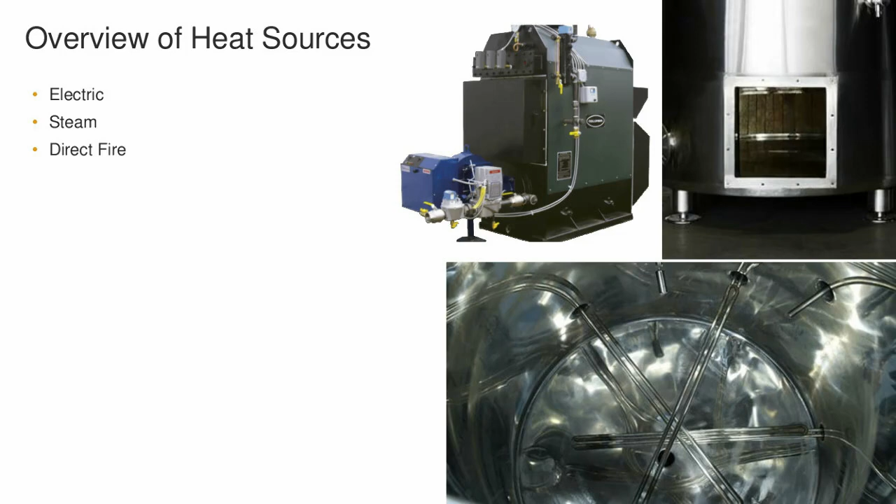So I'll get right to it. It's obviously a pretty big decision when you're looking to put in a brewery. You're going to take a look at what you're doing, and then you really have to make a choice of which heating means you're going to do, and in some cases a combination of heating means. It doesn't necessarily mean you're going to do all one, although most folks do it that way, but we've done plenty of hybrid systems. So a lot of things to consider when making that decision.

The size of the brewery is probably the biggest one. If you're doing smaller breweries, you have more of a range. But once you start getting into quite large breweries, 20, 30 barrel plus, your options start to become limited — primarily steam at that point.

Space requirements is a very big consideration when looking at which of the heating systems to put in. We'll talk about which ones take up less room, and a little about the infrastructure you'll need for any of the three heating methods.

Equipment cost is certainly a big consideration — how much putting in these systems is going to cost relative to your business plan. And installation cost becomes a very big consideration too, where your capital outlay for the equipment may be low, but installation on vent fans and things can start adding up.

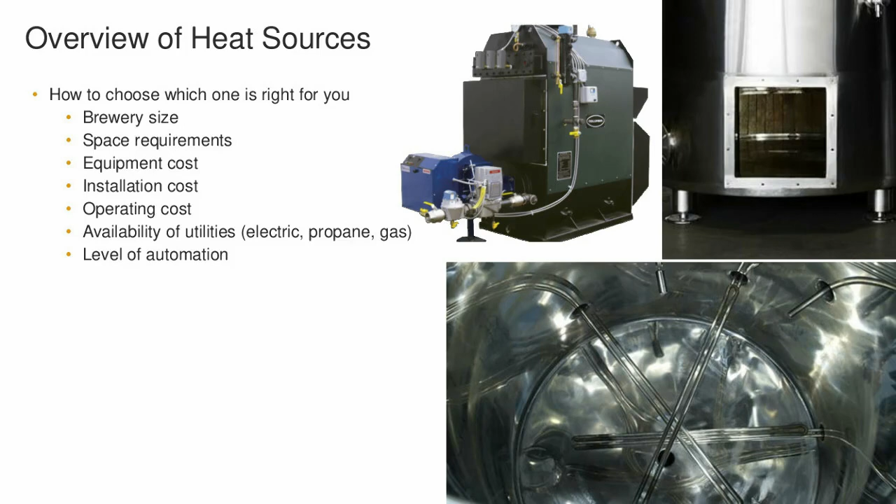All right, so I'm going to jump right in. I'm going to be doing the electric portion of things, so let's get started on that.

So, electric heat. I've been working with electric systems myself since probably the year 2000. Started our business here in 2003 with all-electric breweries. So I've been through a lot of the trials and tribulations of electric brew houses and how to make them into the mainstream. As I think a lot of you know, there are quite a few electric breweries out there at this point in time.

It's become a very affordable, easy, controllable way, especially on the nano breweries, and definitely on microbreweries, and even breweries up to 15 barrel so far we've done. I'm sure there are larger ones out there — I know we've designed 20 barrel electric systems, but it's just a matter of utilities that have to be considered at that point where it's feasible.

So system size could be any size, like I said, up to 15, 20, perhaps beyond. Talking about my experience, 15 has been the largest ones that we've done, and we've done several of those. They worked out very well. A lot of people don't really think about electric for the larger breweries, but they could be very efficient. They can work very, very well, especially if you have very decent electrical costs, and so on.

Another nice thing about electric heat is it is the smallest footprint in all of the brewing systems. Where you're running electricity, your elements are inside the vessels. And as far as external devices, there really are not any. You don't have a boiler room taking up space. For direct fire, you have your gas burners that are going to require certain air requirements and airflow, so it becomes more of a space constraint that way.

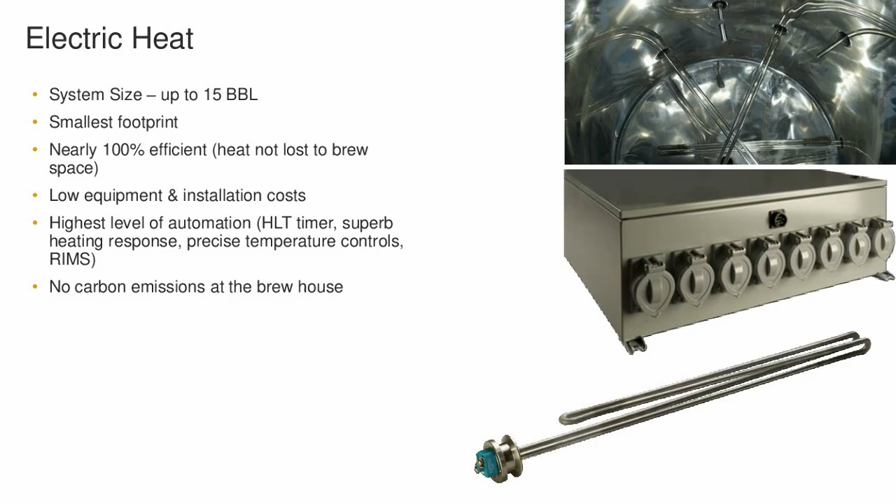So some considerations when putting in electric and evaluating an electric system to make sure that it is right for you. We are dealing with electricity, and I've been around electricity pretty much all my life. Even when I was young, sticking a fork in an outlet, it's not fun, so you have to be protected. So with electricity, there are things that we feel are a must in a brew house. You're dealing with liquids, you're dealing with electricity.

So the first very clear item is to have GFCI protection on your systems. And that can come in different forms. GFI protection can be part of your breaker panel feeding your brewery. However, that is usually only going to work out maybe up to a 1-barrel system, because the GFCI breaker sizes available usually are not very high. So if you're looking at a 150 amp 3-phase system, you're not going to be powering a 150 amp 3-phase GFI to the brew house from your distribution panel.

So a nice design there is to put GFCIs inside the control panel as part of the design. That's what we employ in there. There's different ways to do that. I know some manufacturers handle it as a whole, so there's GFCI protection that will shut the entire panel down if there's an issue. What we employ is individual GFCI protection. So if there is an issue with one element, just that one element will turn off and doesn't disrupt the entire brew session. So either way, there's different ways to look at it.

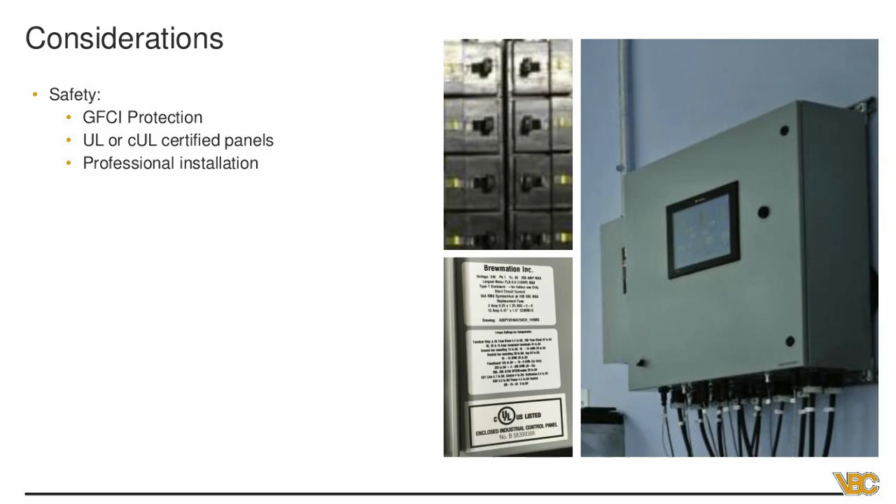And if you actually have 3-phase, in most cases, you're a lot better off utilizing the 3-phase as opposed to just taking the single phase from the 3-phase, because you want to balance that load on your entire system. So if you have 3-phase, certainly plan to utilize that as opposed to pulling off the single phase. And you'll also get better rates when you're working on 3-phase. The electric company loves balanced load, so you have some better rates there.

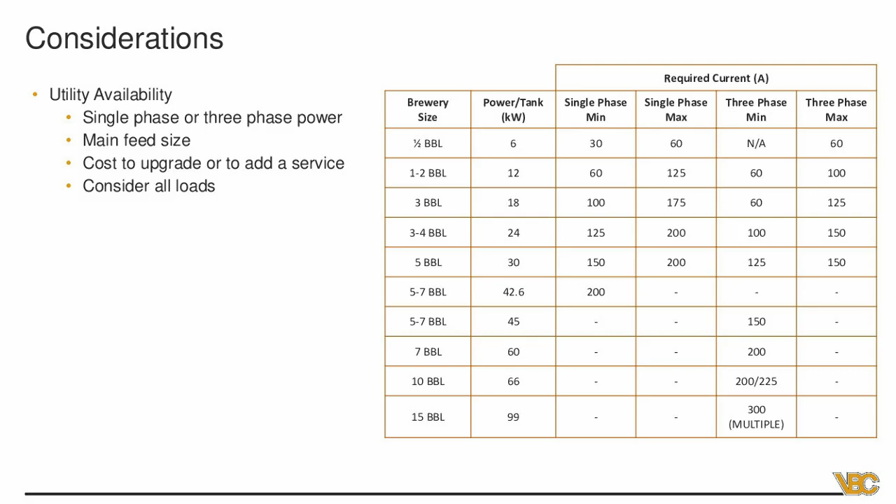A couple other considerations: watt density. A lot of folks think about electric and worry about scorching wort, but when a system's done properly, the watt density is low enough. You kind of think of watt density as the surface area that is touching the wort. So in properly designed systems, we have a proper number of elements, so your watt density is acceptable and you will not get the scorching. So that's definitely something to look at, what that value is, to make sure it is proper.

Also, the ability to adjust from 0 to 100%. I've seen some panels out there where you just knock one of the elements off, but then you have the other elements running at 100%. And that doesn't help you when you have a high gravity beer and you're only a quarter way full. You want to be able to run your elements at a very low percentage. So you want that 0 to 100%. I feel it's very important, and that will eliminate any scorching.

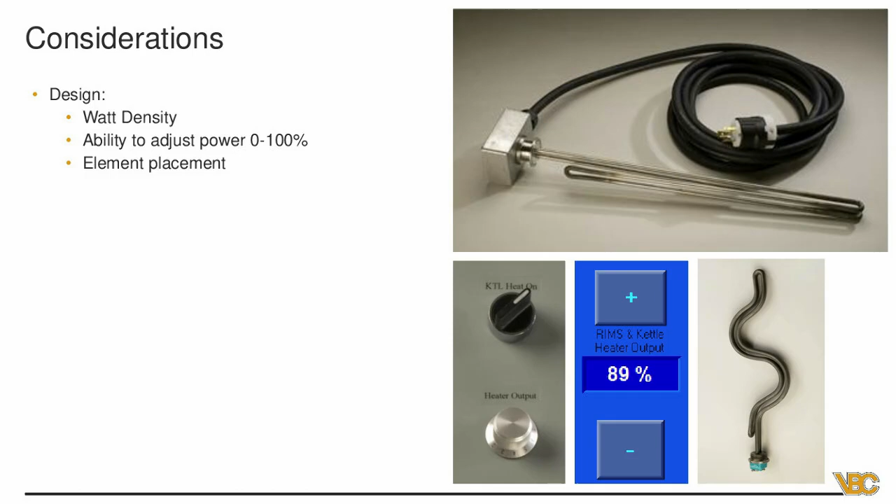Element placement as well is something to consider, where they're positioned to get your rolling boil. Other considerations here, some level sensing. You don't want to run the elements dry, so we would typically put in level sensors to make sure that doesn't happen. The bottom one is a tank level sensor.

The one above it is a RIMS sensor. Boil over control is fantastic with electric heat. You're able to really get a very good reaction and response time with electric. Heat ramping is very quick if it's sized properly. The timer start we talked about a little bit, and also remote operation.

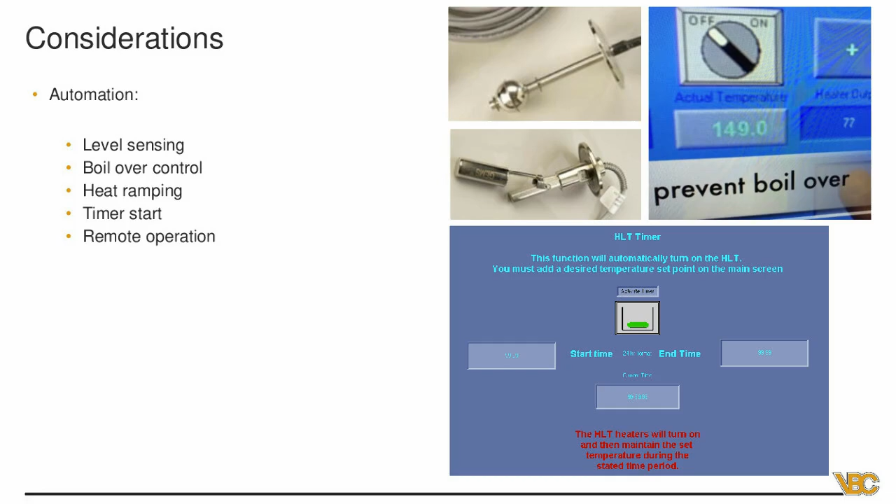You could tap into your system with your network, and you could turn on the hot liquor tank before you come in if you don't have the timer set up. So I'm going to go ahead and pass this along for steam, if you want to pop back up.

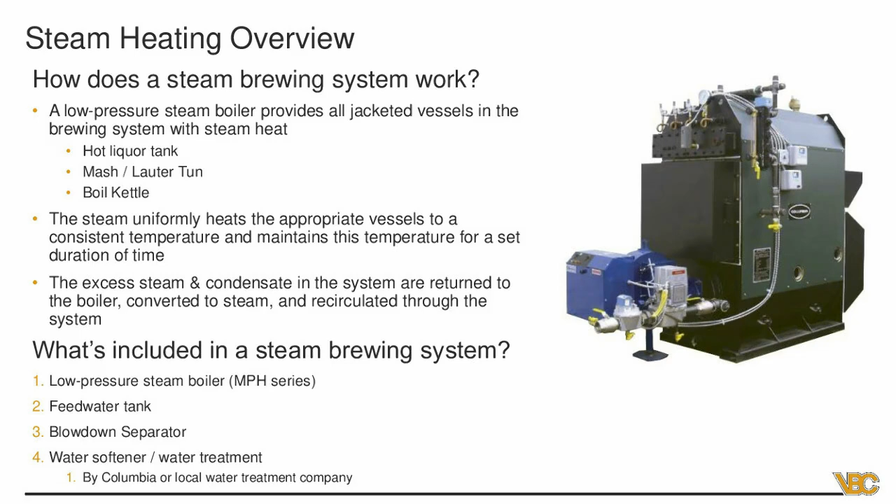So that sounds a little bit technical, but if we go back here and we look at the MPH here, you can see a burner, that blue burn on the bottom left, shoots a flame across the bottom of the boiler. And then on the right side, you can see that black turnaround. The flame turns around once more and then turns around again. And those 3 passes, there are tubes inside of that boiler. It heats up those tubes, which in turn causes steam to be produced at the top of the boiler. Those 3 passes are in a large part responsible for why you're getting a good efficiency here.

Your fuels can vary because not everybody has natural gas. That's typically going to be the cheapest, but there's also propane, fuel oil, and you can run on dual fuel if you even need to. Your operational costs: gas is more cost effective than electricity in most locations. Sorry, there was a typo there. And you can only brew with electricity up to a certain size typically. After that, the amount of amperage needed becomes too great to justify the price, or you might not even be able to find the service, where most places you're going to find fuel oil, you're going to find natural gas.

There's versatility involved with a steam boiler here. A boiler does not require regular maintenance during the brewing, so you can kind of just leave it on its own to do its thing, assuming everything is set up properly. Most of our boilers use 115-volt single-phase power and require less than 10 amps at full load, so you're not really going to have to make power modifications to your brewery, which could be convenient. Relative to the steam they're producing and the systems they are going to be used with, they can fit a small footprint. They're, of course, reliable, assuming you're treating them right and you're treating your water.

And they can range up to 250 horsepower, which supplies 8,000 pounds of steam per hour, and that's enough to power a 125-barrel brew house. I'm assuming most of you guys are going to be a little bit smaller than that, but hell, with the way craft brewing is going, hopefully we're all going to be expanding and we're going to be having brew houses like that.

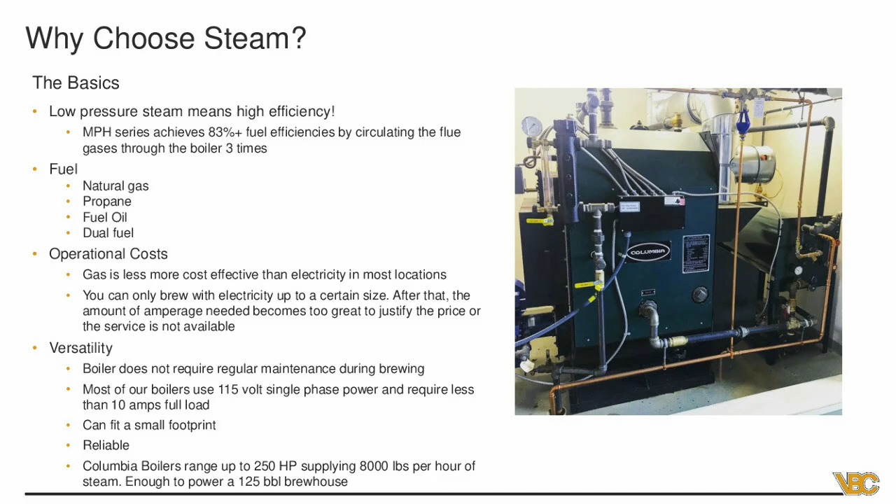So why would a brewer choose steam versus anyone else? So out of sight, out of mind, and this is something I see as an advantage when you get into these bigger breweries, is a boiler is typically placed in a separate room. It's not mandatory, but typically it's away from everything, which could leave you more room to leave out your appealing stainless steel brew vessels. Not that there's anything not attractive about a Columbia boiler here, but everyone does like to see the stainless steel and the copper vessels. And the compartmentalization of this equipment kind of allows it to stay safe. So you're not knocking into it, hitting it with kegs, or sweeping dust onto it. It just kind of stays isolated on its own.

Brewing with steam is better for your beer. So, of course, with the steam being controlled, the temperature, there's very little chance of caramelization of sugars with steam, and it's transferred through a larger surface area, which is much more controlled over the temperature. I'll skip here the DMS and go down to the heating speed. Because of the surface area that it's exposed to, steam provides the fastest kettle temperature ramp-up rates. So you have the sidewalls and the bottom because these vessels are jacketed and the steam is completely encompassing all of that surface area. Additionally, steam has the power to produce a vigorous boil consistently, and a vigorous boil promotes better utilization of hops and boils off DMS, which will result in an off flavor in your beer.

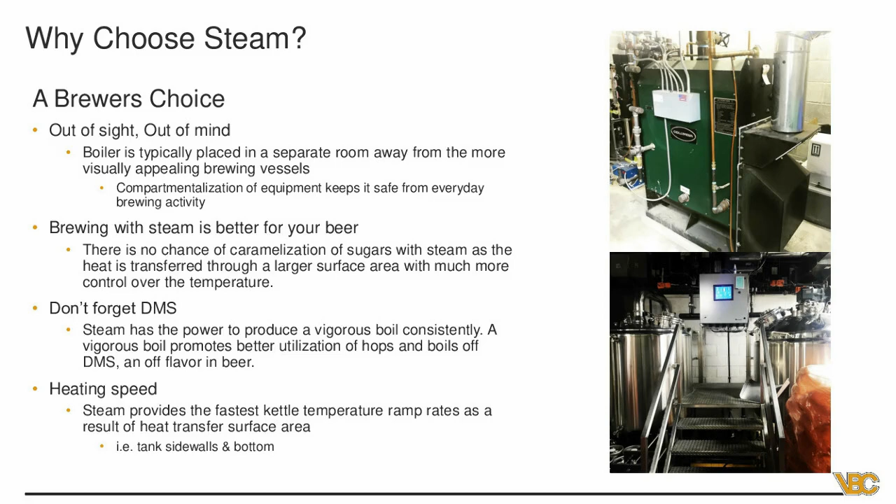So here are a couple other considerations, couple snags here that might say, hey, is steam right for me? So you're going to have startup costs. I think that's pretty much assumed based off of understanding you need a steam system. So although running a steam boiler may be the most cost-effective and efficient method for brewing, you're going to have these costs below. You're going to have to buy the boiler. You're going to have to get it installed. It comes with auxiliary equipment, and unfortunately, most times you're going to need building modifications. The system is more than just a boiler, as I stated before. So you're going to need to have custom insulated piping, which could be a pain in the butt, but obviously worth it to maintain your efficiencies.

You're going to need ductwork installed for the flue gases to go up, and you're going to need a blowdown separator and a feed water system.

Just to breeze over what a blowdown separator is: minerals sit at the bottom of the boiler. Minerals that are in the water as it heats up will fall down to the bottom of the boiler, and if they remain in there, they'll start to corrode the inside of the boiler, which you don't want for your metal. So what you have to do is blow down those minerals out of the boiler, and then obviously refill the boiler with a little bit of water.

A blowdown separator takes that extremely hot steam, condensate, and water blowdown, and mixes it with cooler water so that you're not shooting it right down into, say, a PVC pipe system and melting the PVC. That's not required by law in all states. I know in Pennsylvania for a low pressure boiler it is not, but it's highly recommended for the whole system.

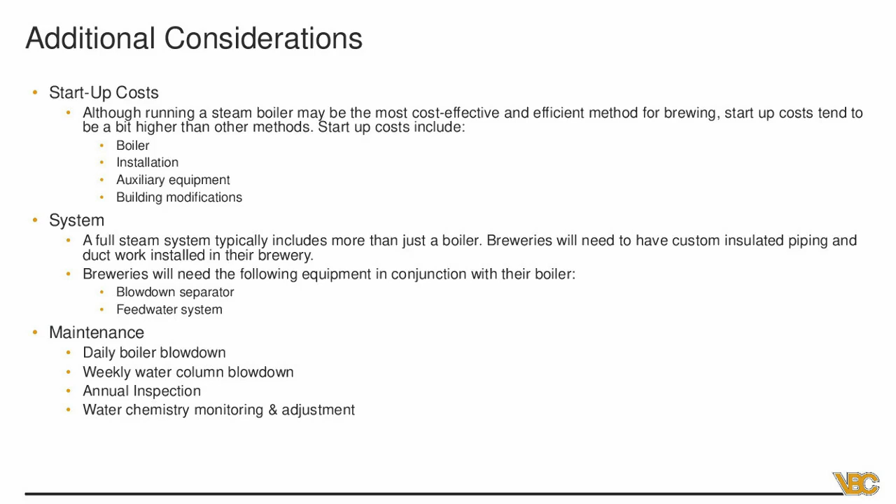So here's just some pictures of the boilers we provide. Obviously there are other companies, but I am a Columbia rep here. This is our MPH series low pressure steam boiler.

There's a blowdown and a feed water system over here. Here are some basic controls that protect your boiler: high water and low water cutoff controls, a pressure gauge so you know what you're coming out at, and your burner.

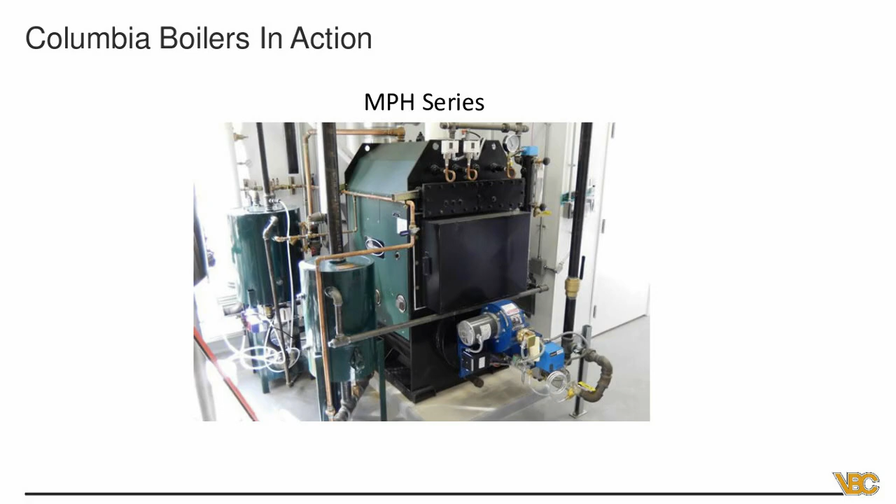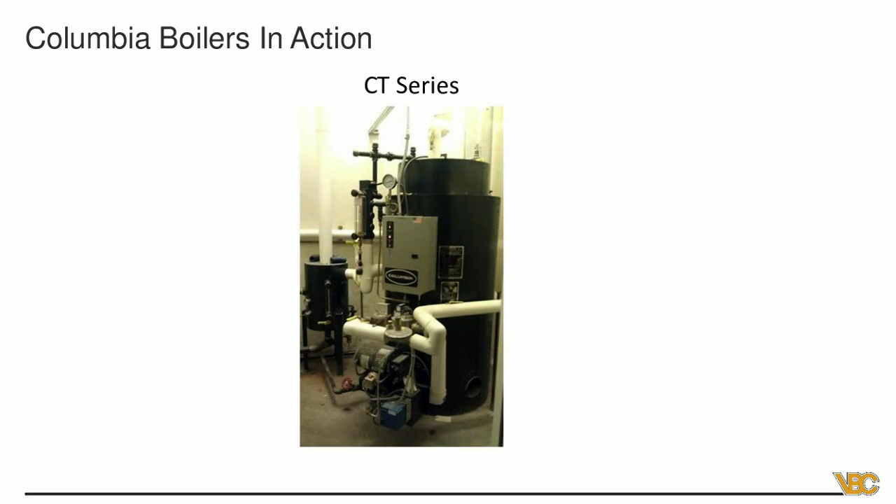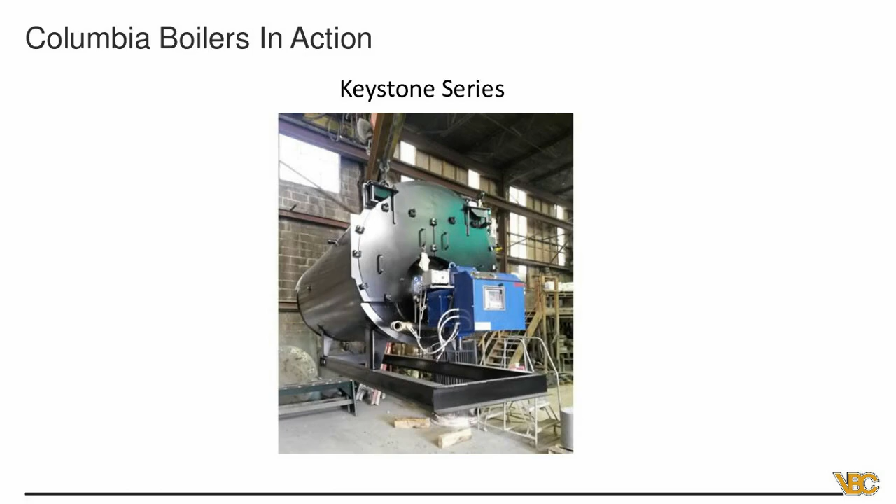Okay, now we're going to hand it off to direct and indirect fire here.

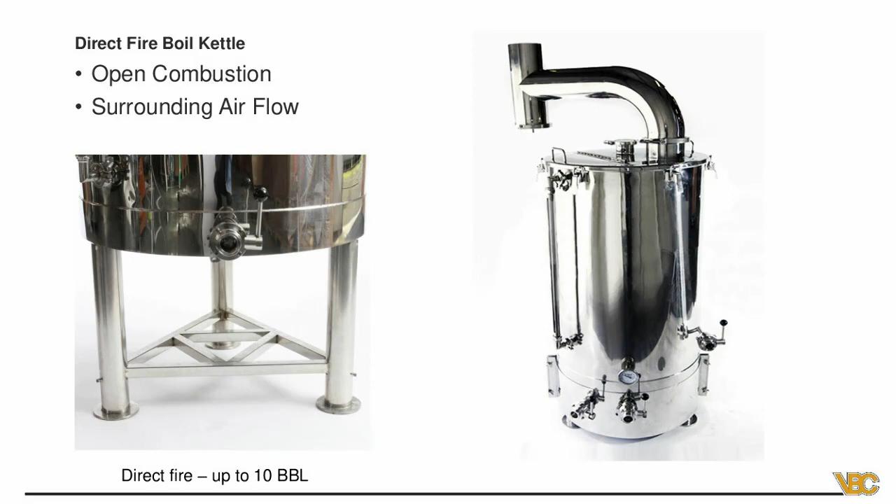The next slide we'll hit here, and we typically go up to 10 barrels on these things safely. My preferred choice, if you are going with fire, natural gas, or propane, are the two common options, it just depends on where you're at, is indirect fire.

So at this point, it's a lot safer for your brewery, your brewers, the area around there. There's no combustion gases being exposed to the brewery or the brewers. There's less heat going into the actual brewery. The flame is really underneath. It's not a true indirect system like a heat exchanger in another room, but it really controls your airflow when you say indirect fire. The refractory brick is great because there's much more insulation. These kettles are a little more expensive for sure, and heavier.

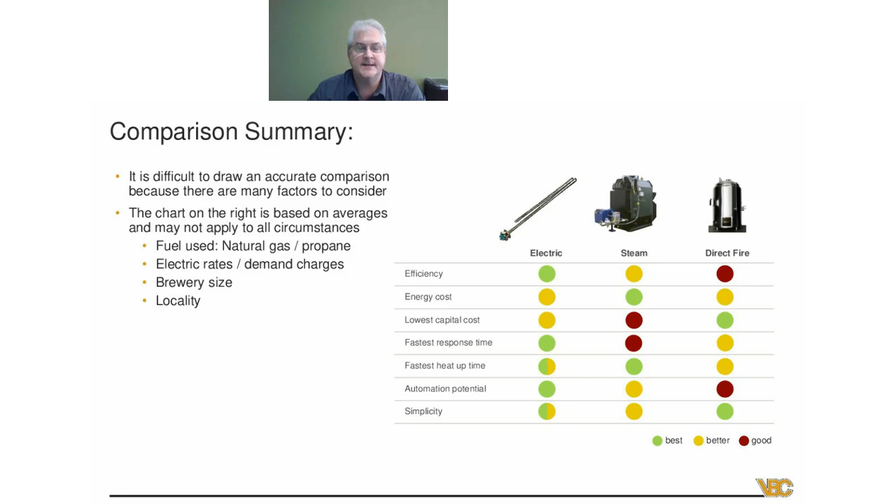All right, so I'm going to take - so you guys can see this a little bit better. This is interesting, we get the question quite a bit, and this may spur a lot of questions and maybe even spur some controversy. I don't know, but that's not the purpose here.

The first thing I'm saying when we start comparing all three of the different methods is that it is difficult to draw an accurate comparison because there's so many factors to consider. But since we get a lot of questions, we wanted to put a table together that gives a general overview on average. But the fine print here is that a lot of these can be switched around based on individual circumstances. So basically, the chart on the right is using averages, and we're looking at fuel used, which can definitely vary these results.

Natural gas versus propane, electric rate, demand charges, if you have them, can also change things around quite a bit. Talk about that in a sec. Obviously, brewery size and even locality. I believe at least two states, Texas and California, will require the steam boilers to be low NOx boilers, and that's obviously a consideration that can sway one way or the other.

But when we look at efficiency, just pure efficiency of BTUs being transferred, as we discussed, electric, when you do have immersion heaters, you're very close to 100%. Someone asked in the questions what the possibilities are for an electric steam boiler, and absolutely, that is definitely a technology. We offer that as well. So electric boilers are definitely a nice choice if you did want to use electric and you just really wanted to have that steam for your brew kettle.

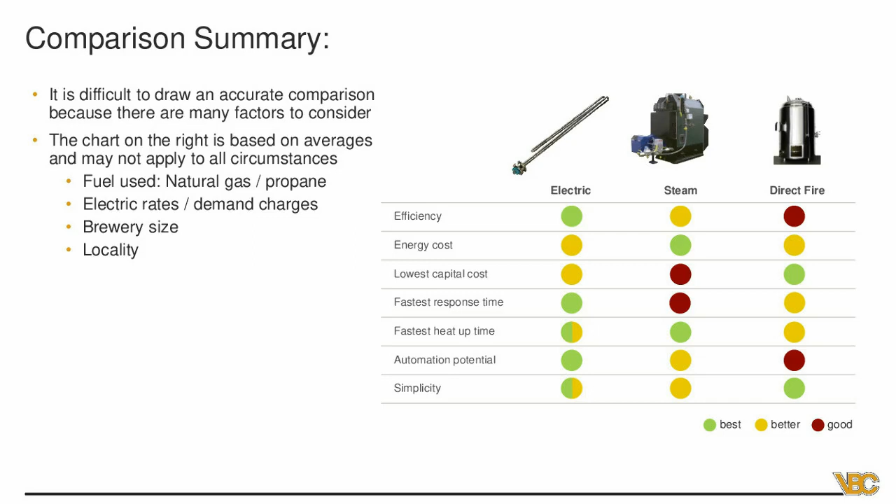Electric is measured in watts, steam in horsepower, and fire in BTU. How do you compare systems by output? Typically, I'll convert any of those numbers. So you've got watts, which is a direct correlation to BTUs, as is the horsepower, which you could look at as pounds of steam. And then direct fire is BTUs. So when we do the comparison, we always get everything onto a BTU level and then just take the efficiencies and losses into account and go from there.

But you guys could chime in on that one too. But yeah, so completely agree. You got it, Tom. No problem.

Okay. Do you guys tend to see breweries avoiding steam systems in zoning restrictive areas? So I am kind of new to this, so I don't want to answer with extreme confidence. However, I have seen people in Philadelphia say that they're trying to avoid steam for reasons similar to that. If I had to guess, I would say that's probably dependent on where you're located. And Kevin, I'm sure you have more experience than myself, so maybe you could answer that as well.

A lot of times when I see that come into play, it would be in the low NOx category. Right. California, I think Texas. Are there any other states that need to really be cued in on that? I think there might be a province in Canada too. But you have to make sure that if there are some requirements for the emissions, then you end up getting into a low NOx burner, which is going to be under the threshold that's required. And it's very important, especially in California and Texas, to think about that, because you don't want to put in a burner and have them reject it. You have to take it out or replace the burner. I'm not sure how complicated that is or not.